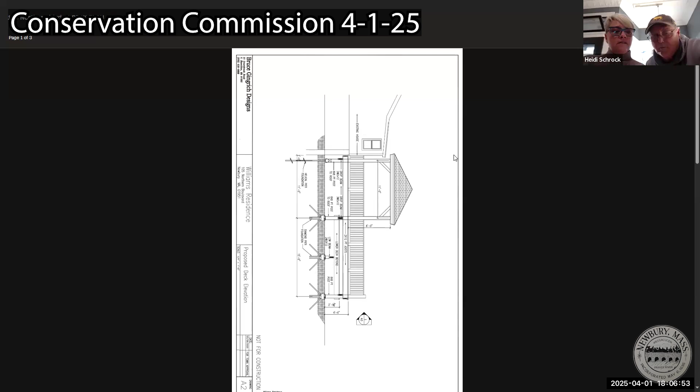Okay, can you rotate that plan? You should be able to. One second.

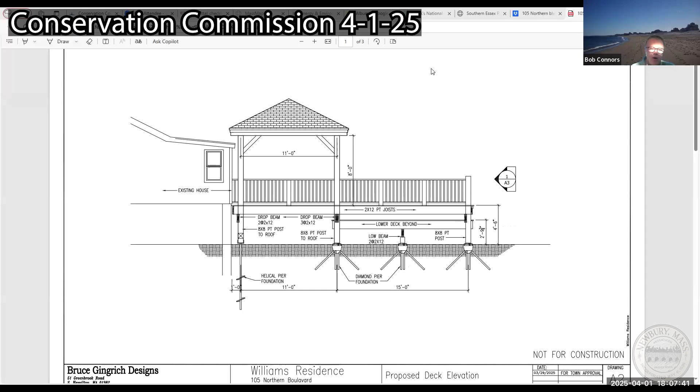So Woody, all we've done is approved the meeting minutes for the March 18th meeting, and we're on the first order of business, the RDA for 105 Northern Boulevard. We're just looking at the plans the applicant has submitted showing the diamond piers and the elevations. As I recall, that's the additional information the commission was looking for, Mason?

Yep, that's correct. Mason, do you have any questions on this, or are you all set? I don't have any questions at this time. Okay, why don't I open this up to the members for questions?

TJ, do you have any questions on this one? Why did you skip me for now? This is the first time I'm looking at this, Bob. Okay, I must have missed this one, but I'm just taking a quick peek.

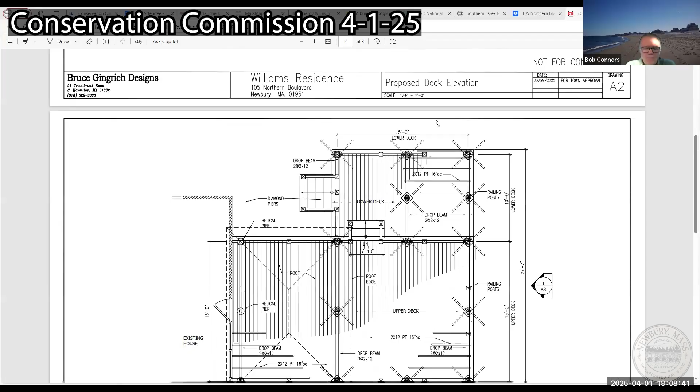I wasn't at the original meeting on this, but Mick, any questions on this one? No, I think we were asking for details on the pier supports, and this seems to meet that request. Okay, so I think we're good. Anything else, Mick? Not at this time, no.

Okay, Diane, any questions or comments on this one? I recall on this one, you guys are replacing a deck that is already there, and then you had another area that's sort of like a patio that you were making into a deck. And I recall we had talked about existing versus what's new. I still am not seeing what was there in comparison to like an overlay. What is this new plan going over what's already there?

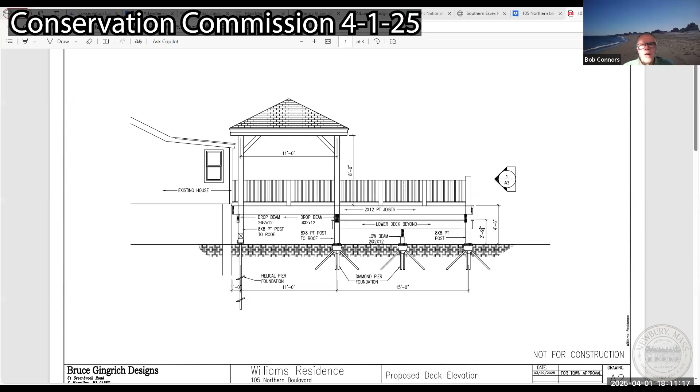Okay, hearing none. Do any members have a request for additional information? Okay, hearing no request, I will entertain a motion to issue a negative determination for 105 Northern Boulevard.

So moved. Second? Mick, is that you? Yes, it is.

Okay, roll call, all in favor. TJ, aye. Woody, Yes. I apologize, I skipped right over you.

You're hard to be invisible, you're just such an important feature of this commission. I didn't have any questions. I would have spoke up.

Okay, well, sorry about that, Woody. No, it's okay. Okay, Mick? I joined late, no additional questions, thank you. Okay, Diane? Yes. And voting Bob Connors on the motion votes yes.

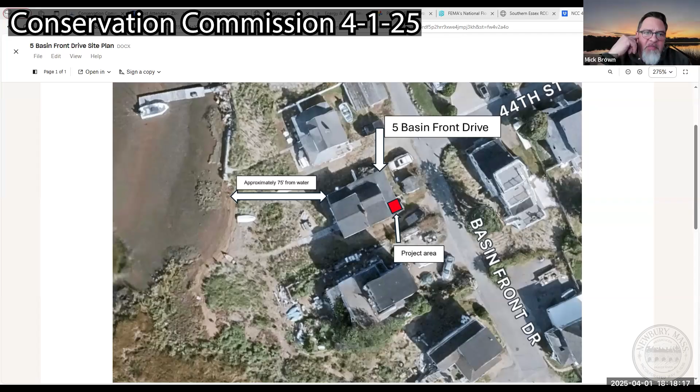Okay, Mick, what are your thoughts on this one? Yeah, I don't know, on the first drawings that Mason showed, it appeared that the only change was really the roof line. Am I correct on that, Mason? I think they're just enclosing the sides, making it - there was a change to the roof line as well. Was there? Okay, yeah, I can share that.

Okay, so they're making it, left is existing and the right is proposed. So they want to put more of a gable end on that than a flat roof.

I think if there's no change to anything below ground and they're not expanding, it should be okay to go forward. Are you comfortable just saying that in the event footings need to be replaced, concrete sonotubes are not allowed?

Yeah, they'd have to meet the basic standard, but just changing the roof line too, it doesn't appear to... you have runoff in one direction, now you have runoff in two directions. So just as long as they compensate for that. I look at the design and you've got a roof pitch into your stairway, so they're obviously hopefully going to compensate for that, but that's more of a construction issue as opposed to a ConCom issue.

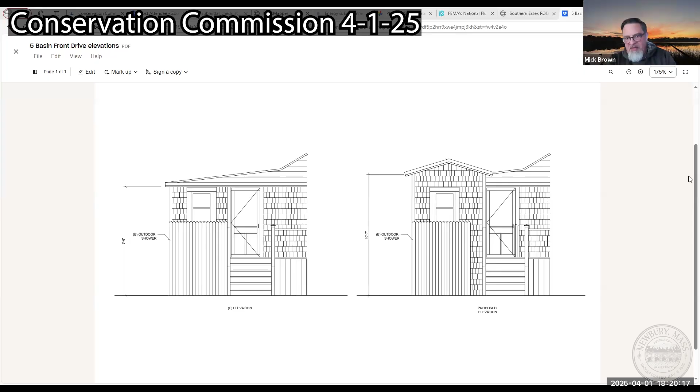Okay, so why don't we continue this to April 15th. If the applicant should pop back on, Mason, if he got disconnected for some reason, we can circle back to this before the meeting's over.

Okay, sounds good. All right, next application is a request for determination of applicability. 13 Plum Bush Downs, applicant is submitting an RDA for installing a crushed shell driveway and other minor associated site work. Project is within 100 feet of the salt marsh, proposes native plantings as well.

Mason, why don't you give us a quick overview, and is the applicant here? Yes, the applicant is here. So it's the addition of a crushed shell drive.

Right now it is not really vegetated. It's just kind of dirt and mud. It's been kind of just torn up and degraded. In addition to the proposal of the additional crushed shells, he's proposing to remove an old concrete holding tank, and I believe he is planning on doing some native plantings as well around the property. So I will share the site plan and hand it over to the applicant.

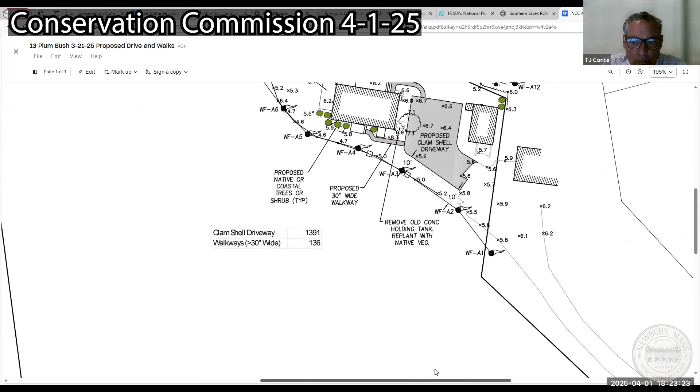Proposed versus existing numbers of what you're getting, what you're giving back as to what you're expanding. I think the question is, we're giving you something, what are you giving us back? What improvements are you making? You gotta pay the piper, Seamus.

Gotcha. Yeah, I think looks like you have part of that proposed in there, but just to quantify what it is. Sure, I think part of that is removing that tank, obviously, and then trying to do some more of these like native plantings around the house. I saw on the mass.gov website, they have a list of recommended coastal landscaping plants as well.

So probably something of that nature. And then, like I said, I guess that's what it would be as far as giving back right now. Like I said, there's not much there. It's a lot of mud and dirt, and at the time, with the time being...

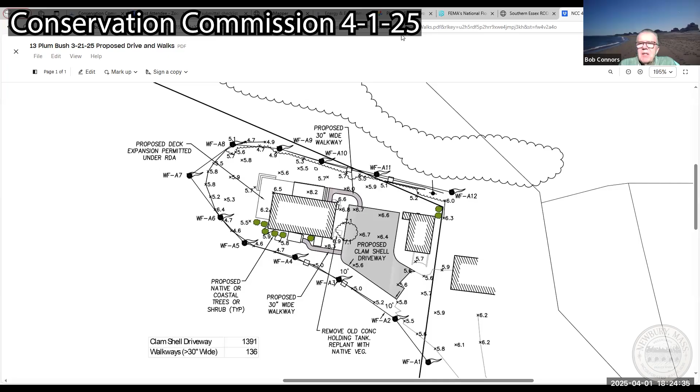So propose like a pervious material, obviously, for water drainage and stuff. But I mean, typically, you have an existing driveway and you have a proposed driveway. I think that's what TJ is getting at. Yeah, so what's the delta between the two?

We lost the picture there, but I was going to pull up some photos if that helps. Okay, yep, perfect. I think that proposed plan, I should pull it up here too. I'll just bring this back up for now. I have to share the photos over to my computer and then I can share those with everyone.

So the line does show kind of where it's gray. You could see like that 5.6 at the bottom right, it says 5.6, 5.6, 5.8. So that's kind of where the driveway stops now, and it's all 3/4 crushed stone there, but basically up to the front walkway, or where it shows the proposed front walkway - if you cut a line straight across to the boathouse, everything under that is dirt and mud. So it's not really like an existing driveway per se, in the sense that it doesn't have any of that 3/4 crushed stone brought in.

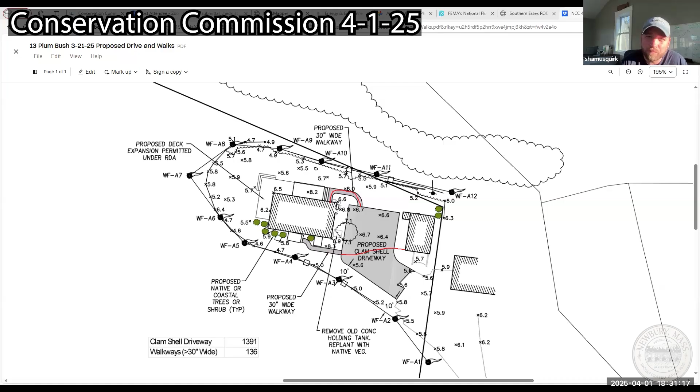Woody, go ahead. My only questions were already answered - what the walkways were made out of. And if I recall from when we saw you before on the deck extension, it's lawn all the way around the house, correct? Manicured, mowed lawn? Yep, so I'm good. Thank you, I have no other questions.

Are there any raised hands from the public at this time? If anyone has a question on this project, just give us your name and address. Okay, hearing none. All right, so team, to do a recap.

I think if we consider a negative determination, I don't want to use the word conditioning it, but any disturbed areas must be revegetated in like kind, and the applicant will submit to the agent the species of 12 shrubs and determine the location in the field with the agent. That way, where there's any disturbance, whether it's lawn or whatever, we'll get it reseeded, and adding some bushes to this project will be a benefit to the resource in my mind. So what's everyone's thought on that?

Mick, does that sound okay? I think that's good, that's a good plan, Bob. Yeah, not conditioning, but just making sure disturbed areas get revegetated. Absolutely, that would be the intent. TJ, good with that? Diane, how about you? Fine. Woody, does that work for you? Sounds good.

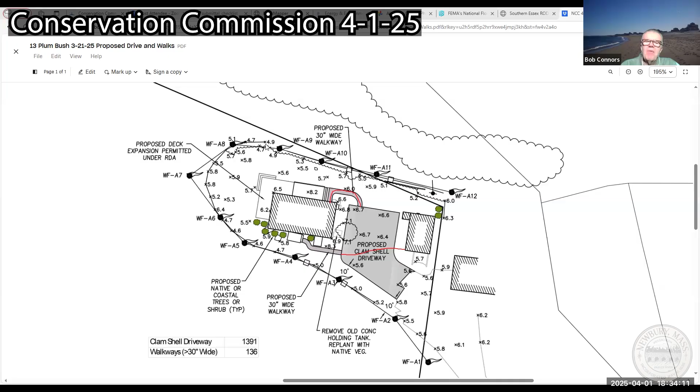And that he'll have a pre-meeting with the agent prior to planting, prior to start of work. So just to clarify, with that determination, I can go ahead and install the driveway and walkways, but prior to plantings, call Mason for a pre-meeting. Yep, usually what you do is call for a pre-meeting, go over everything, lay out what you're doing, and at that time verify where you're going to put the shrubs and the species. And then at the end just make sure anything disturbed is replanted. Mason, do you have that information? Yep.

All right, so you've heard my motion, I will entertain a motion as stated. Do we have a motion? So moved, second - TJ and Diane. Okay, roll call, all in favor: TJ, aye. Woody, yes. Mick, aye. Diane, yes. And Bob Connors.

All right, next matter is a request for determination of applicability at 1 Jackson Way. The applicant is submitting an RDA to install a standby generator on the left side of the house. A concrete pad is proposed to be constructed as a platform. Mason, why don't you give us an overview on this, and if you can - I noticed there was a location submitted, but there wasn't an elevation on the platform, as I recall.

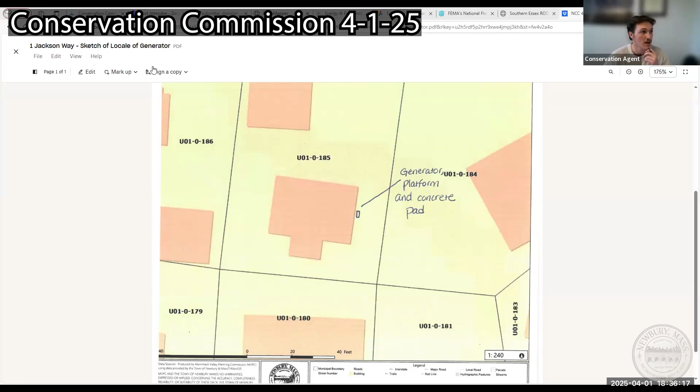Is the applicant present? I believe this is Sam Gobriel, I'm Kareem's dad. Kareem is probably on the train, I don't know if he tried to call in, but I'm helping my son with this project and working with Moral Electric.

I visited with the owner of Moral Electric when he located the generator from the corner of the house, and it is a prefab pad, as I understand it, and it would be a minimum of 2 feet off the ground, maybe 3, but we'll just see how it ends up being. That existing small shed right there is the old standby generator. It will be to the right of that, towards the corner of the building, away from the deck, and it will clear the required measurements from the window as well as the deck height.

Sam, where is the propane? I'm assuming this is going to be powered by propane? The propane tanks are in the back of the house, the opposite corner, exactly the opposite corner. So it's the back right of the house where the existing 2 propane tanks are right now.

Now, to run the piping for the propane to the proposed generator location, are you going to attach that to the house, or are you proposing trenching it, burying it? Proposing to bury it, so they'll dig a trench to the back corner of the house and then make a right-hand turn, dig a trench, and connect to the line right where the tanks are.

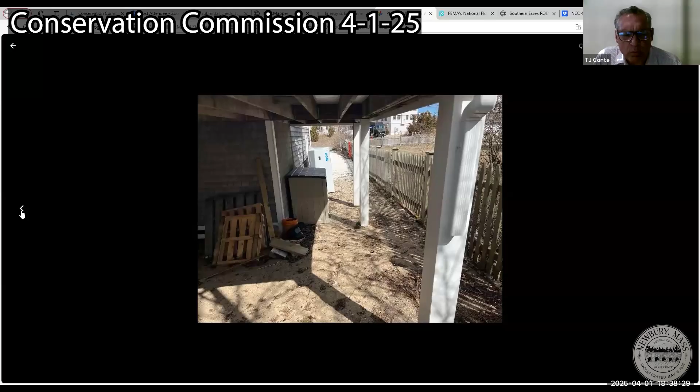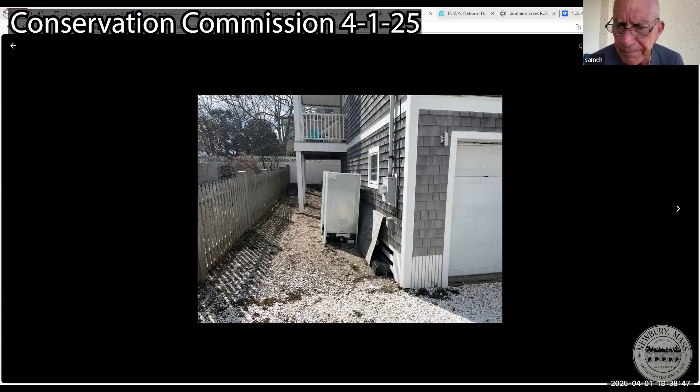Okay, why don't I hold you there and open this up to questions from the members? TJ, any questions? What is the generator sitting on, going to be sitting on? Going to be sitting on a concrete pad, and then on top of the concrete pad will be a wooden platform, I believe it's pressure treated wood, to raise it off the ground. Anything else, TJ? No, the tanks are already there, I assume, correct? The existing tank for the house, yes. Okay, I'm good.

Woody, questions for Sam on this one? No further questions, they've all been answered. Mick, questions for Sam? I am all set on this one, Bob. Diane, how about yourself? Nope.

Thank you. Okay, so Sam, traditionally we want to see the generator elevated by 2 feet, and typically it's just 4x4 pressure treated timbers put in the ground a couple of feet. Concrete is kind of a no-no out there on the island to support the base. Mason, could you share with Sam or the applicant a typical example, I think Dave Mullins' house on Northern Boulevard had the elevated tank, and it just gives you an idea what the commission usually accepts. So having a concrete pad on the ground and then building off of it 2 feet.

The 2 feet elevation is great, concrete pad is not. So why don't we do this: Mason, you can share with him a sketch and go over what we typically do. It can all be done with pressure treated wood, that's what everyone else has been doing. Mason could even give you an address that has the elevated pad that we typically approve.

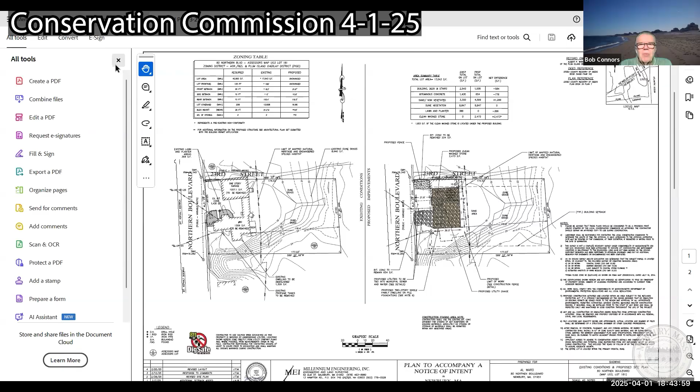Okay, so Al, welcome. If you could just give us your name and address, and if you want to make some opening comments, please feel free to. Sure, yeah, it's Al Ward from 80 Northern Boulevard, and my comments are pretty much already addressed by your opening statements here. Just wanted to talk about how we...

After considering issues brought up by the neighbors and the DEP, we decided to change the location of the proposed house and move it further north away from the dune and eliminate the garage entirely. So we're now staying within the existing footprint of the current house, which resolved all the issues raised by the DEP. But yeah, so that's just to kind of recap what's already been discussed here.

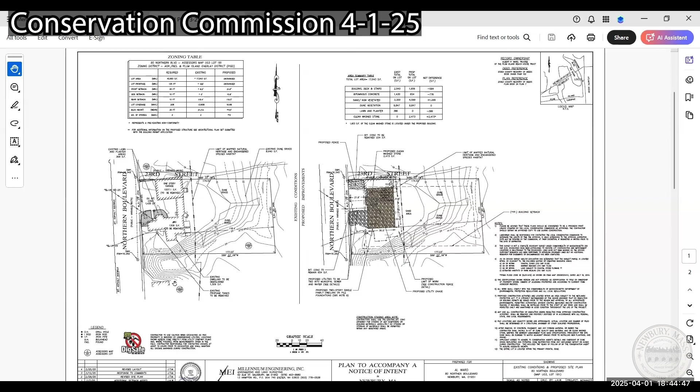So TJ, I'll just hand it over to you to go over the details in more depth. Yeah, no problem. Could you just expand that plan a little bit? Yeah, I was just kind of doing it so you could see existing versus proposed, but we can pop back into the existing here. Yeah, there you go.

So again, like someone stated, previously the garage was proposed to remain. We're proposing to remove that at this point. The house is shifted up pretty much right on the setback line. We're like a foot off just to allow for a little bit of play during construction, maximizing the buffer between the southern abutter and the most southern part of the house.

As doing such, we slid the house back to meet the front setback line. We've obviously removed the remainder of the house. This crosshatch here is the limit of clean wash stone we plan to install as part of the parking area and driveway for the lot. This area here is currently paved, and we're proposing to leave that in place to serve as that portion of the driveway. This was currently paved as well.

That will be removed. Let me hop over to the existing plan for a second. Remember previously we had a big green area here of dune vegetation that was going to have to be taken out as part of the old previous location of the proposed dwelling. The two areas we're showing now to be removed - this area here is mowed and maintained lawn by the applicant, and this area is kind of like a planter bed, non-native dune. It's not a dune grass area, so those two areas are proposed to come out.

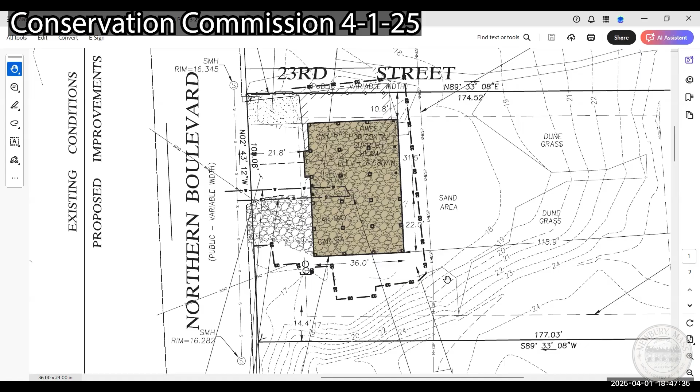We've updated the erosion control line to just hug around the existing foundation. Any disturbed areas, like the foundation, driveway, or garage areas that are supposed to be removed, will all be replaced with sand. As Mason stated, we received confirmation from DEP that all their previous comments have been addressed, and I believe we're good to go from their perspective. So I'd be happy to answer any questions the commission may have.

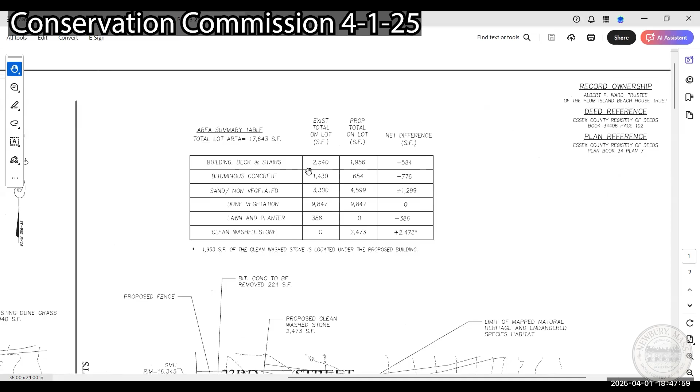Let me start. What is the square footage of the pavement you want to retain? Right up here. So we're proposing to keep 654 square feet of pavement.

Okay, and what's the proposed wash stone area? What I'm getting at, TJ, is that our bylaw limits you up to 2 parking spaces. You certainly have a right to maintain the pavement area, but you don't get to expand in another area unless you're eliminating the pavement. I think we allowed 2 9x18 parking spaces, 324 square feet.

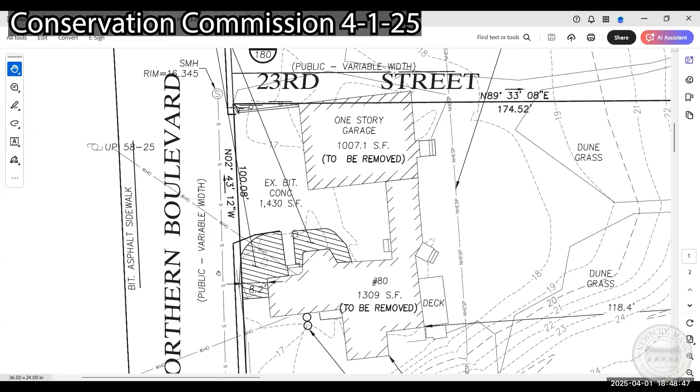Yeah, understood. I think I was going to say that the property currently gets 7 cars, 8 if they're small, because we're getting rid of the garage. No, Al, I get that, but you're doing a redevelopment, a tear down and a redevelopment, and you're limited. We can't let you expand your parking area beyond what's already grandfathered.

The wash stone you're showing, if you could go back to that plan, TJ. That looks almost like walking pavers, not 1.5 inch minus crushed stone. Where are you proposing to park the cars under the house? I believe the under the house spot would be the furthest north, one spot there, and then the two south ones—one has a stairway to get in, and the other has a shaft for utilities.

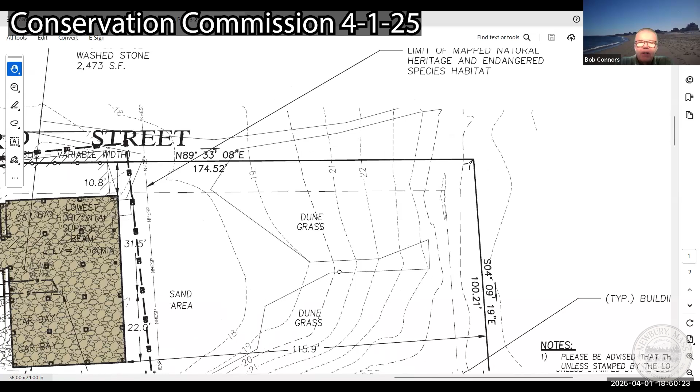Like I say, I think you've done a great job reducing the scope and meeting a lot of the neighbors' concerns. I'm struggling with the square footage you're proposing—expansion of a driveway beyond what's already grandfathered. And then you're proposing to add, what are you using for stone, TJ? What's the proposed stone size? Is this stone gravel? It's clean wash stone. I know the hatch is deceiving, we just do that for depiction purposes, but it will be 1.5 inches at the surface.

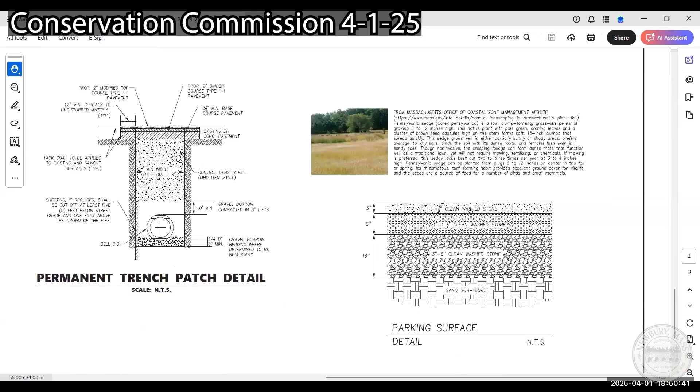What we've been doing—a lot of times contractors tell us that if you do a full depth of small stone, it tends to cause a lot of rutting issues. So we've come up with something similar to this, giving more structural depth and then a small stone at the surface.

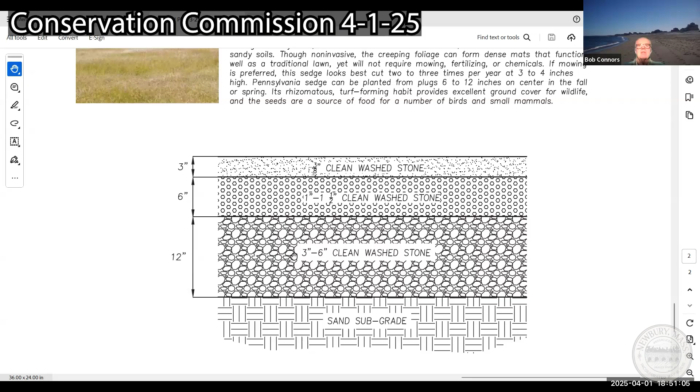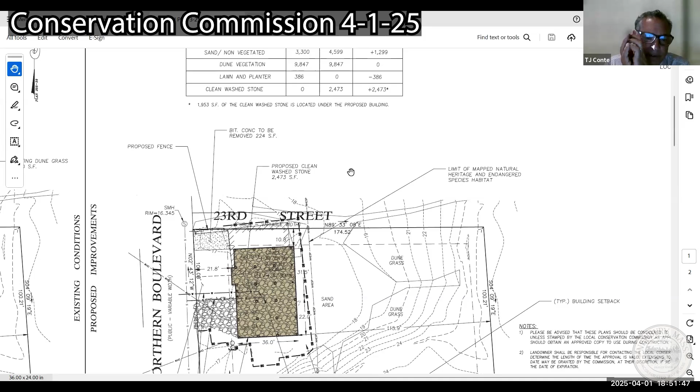If they take up the hot top and put in all crushed stone, does that mitigate some of the extra parking? Well, if you realize we've had a matter right down the street that was open, they were looking for more than 2 parking spots. It became an issue. Town council ruled that they were adding up to 2 parking spots.

Al Ward does have existing parking here that he can maintain, but he can't exceed what he already had. He's grandfathered to a certain extent to the hot top that he has, and in the past we've considered letting them remove the hot top and put in pavers, but they have every right to maintain the hot top—it's a non-conforming existing yard feature. But to expand beyond that is where I'm hung up. TJ, you had a response to that?

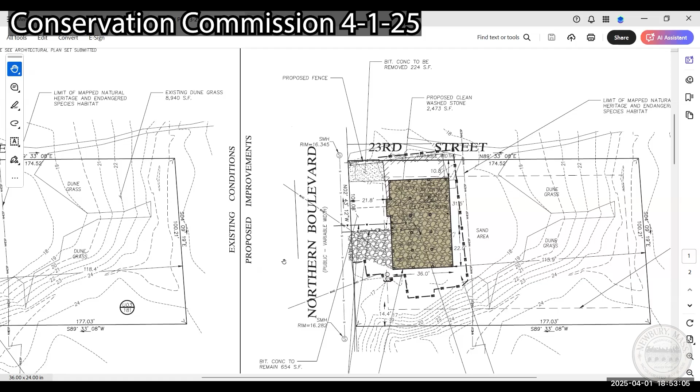I just wanted to clarify one thing. You mentioned the addition of parking spaces—if we did not increase the amount of spaces from what's currently there, would that be acceptable to the commission? Like if we limited this to 3 under the building and 3 up front for a total of 6, where currently they can get 7, including the garage? Well, but you're kind of moving it from point A to point B, TJ. Yeah, it's just—this has gone through town council, it's gone through DEP. There was an appeal on this very same issue in another location.

And so it's kind of on the front burner for the commission. Our bylaws do give you up to 2 parking spaces if you don't have them.

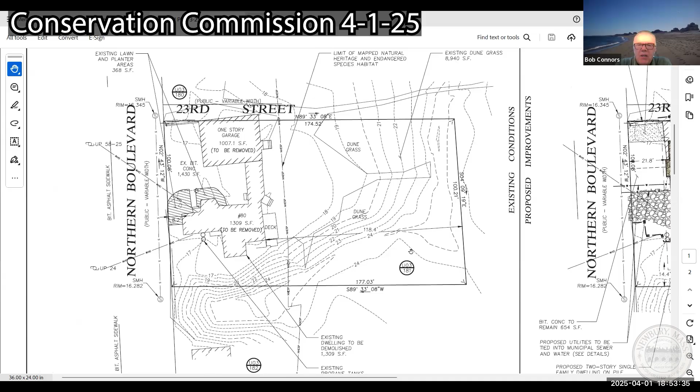So you've got what, 600 - go back to your table, if you would. Yeah, so we... I mean, what may be an improvement is if you eliminate all bituminous concrete and go to crushed stone. That might be an offset that could give us some wiggle room to give you what you want, give you the access that you want. So let me hold there.

TJ Conte, any further questions? No, I'll circle back with everybody. My question, if they eliminated the concrete, the hot top? Yeah, no, it's a good question. Woody, what are your thoughts on this? The parking seems to be the topic right now.

Yes, I have a couple questions. Parking under the building, are those considered parking spaces on the 2 that you're talking about? No, because they're within the building. So the 2 parking spaces only apply to the pavement that they're leaving behind out front, correct? Yeah, but just to be clear, if they had no parking, they could have 2. If they had 1 parking spot, they could go to 2. If they had more than that, they're grandfathered.

Okay, so where the square footage comes in, they really can't have more than the square footage of bituminous that they're proposing as parking outside the footprint of the house. Outside of the footprint of the house, okay.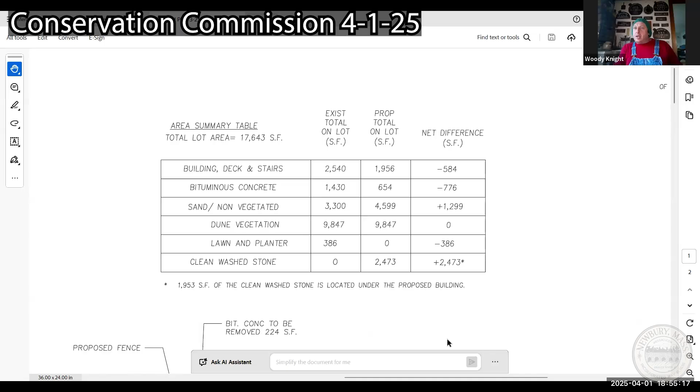Now, where the hashtag rock is, if you just move the screen - yeah, sorry, I was just trying to double check one thing as we talked about that. Go ahead, no worries, sorry. But on the screen there, it says the 21.8, that's the pavement. And the hashtag below it - this is right here - what is that right now? Pavement or sand?

This is like kind of the maintained lawn and planters in front of the house here. So this is the limit of, there's some pavement, right? If you move over to the right, yeah, there's an existing walkway, and there's all the area to the right where there's a squared off area, a little more to the right, TJ. This is all pavement now. So this is a paved driveway inside where TJ's cursor is circling, all the way up to the property line where it is now.

So that's all asphalt. I could share a photo if that would be helpful. Yeah, no, I think we're clear on that, and we're getting back to...

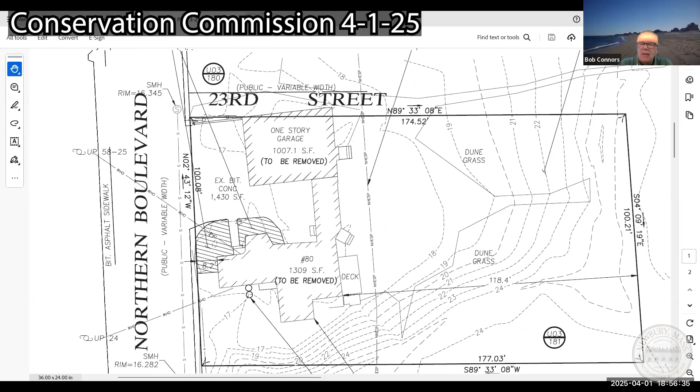What improvement are you making? You're in a very active primary frontal dune. By removing the house and raising it up, all good marks, by keeping it within the footprint, you know, same thing. But, you know, dune performance is always our concern. And although you have pavement, you can keep it all where it is, but the minute you start moving it around or eliminating it, it doesn't carry forward in my mind.

So the 21.8, or the 600 feet, is what you're leaving remaining outside the footprint of the proposed house, correct TJ? Correct, yep, the 654 is what we are currently proposing to keep, with a net reduction of 776. So, because you're eliminating that, because you're building the house on top of it. Correct.

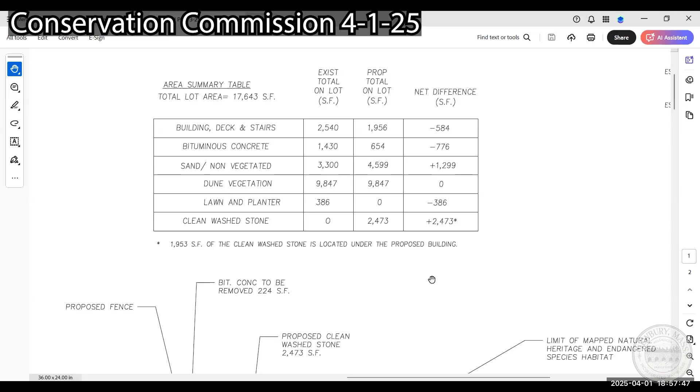Now, what is the area where you show the wash stone? Clean wash, okay. See, you're adding 2,400 square feet of clean wash stone. So outside of the building footprint, we're adding 520 square feet of crushed stone, which is additional driveway, ultimately. Correct - which is still less than the total of the current driveway now.

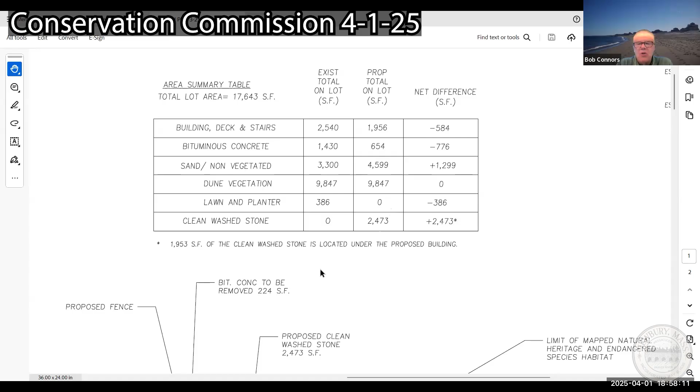Even with this additional driveway shown, we're reducing the overall driveway by 220 square feet. You're abandoning the pavement where the footprint of the house is. That's a decision you make, not us. Let me hold that thought and get on to the next member. Mick, questions on this project?

I'm going to move away from the driveway issue for a second. One of the things we discussed on the site visit, and was a topic in the previous meeting, is about the demolition of the existing building and how the dune to the south side of the construction is going to be protected. What's your limit of encroachment on that dune for demolition? What's the plan for live loading, dumpsters, demo and construction with relation to protecting that frontal dune?

Sure. I've spoken at length with the demo company, and they provided a letter explaining that they're going to be working from the north side of the house, starting on the south side and caving everything in to itself, so they're not accessing south of the house. They're going to start in the middle area in that paved driveway, and basically bring everything in on itself and haul it away piece by piece - pulling the garage out west towards Northern Boulevard, then moving in, pulling forward heading in the southerly direction, so they don't access any of the sand area of the property at any time during demolition.

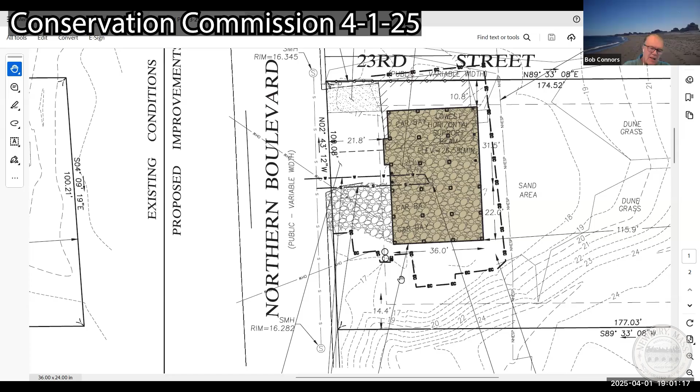Okay, thank you, Mick. Dianne, I'll circle back, Mick, because we're going to have public comment. What are your thoughts on this one? I think it greatly improves the situation that was going on with the dune there, but in doing so, unfortunately, you've stripped yourself of some parking - so back to the parking issue.

I really don't have questions, I understand what's going on here, but it's just how many parking spaces? So you have 3 under the house, and then how many up to the house from Northern Boulevard? It's 3 or 4, depending on how large the vehicles are. The way we wrote it out this way is because it's similar to what we have now - it's now all on pavement, getting 7, but the proposed one has a reasonable way to park the same amount, so really 3 to 4 in front and 3 under is really what we're looking at.

So Dianne, the parking under the house - the issue with parking is if it's under the house, it's not displacing vegetation. If it's outside the footprint of the house, the intent is to minimize the disturbance of vegetation in a primary frontal dune. And what's under here now, under where the crushed rock leads from the street to the house? That's primarily just a typical sandy, gravelly - it's not hot top, it's not crushed stone, not vegetated - it's Plum Island barren land.

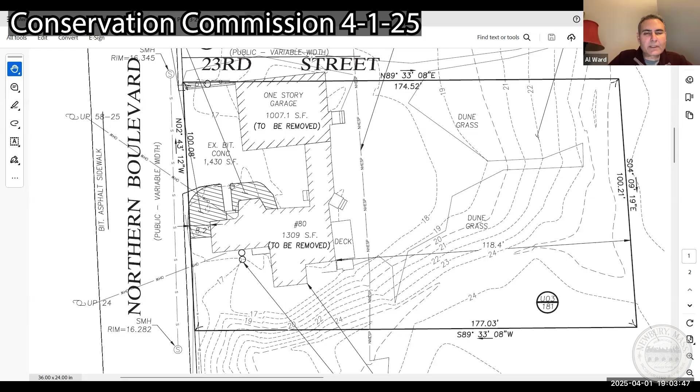Can't solve it. What's the fence made out of that you're gonna be putting in on the walkway side, the 23rd Street side? We were thinking of a fence comparable to the one in front of the house now, which is a split rail fence. Okay, that's it.

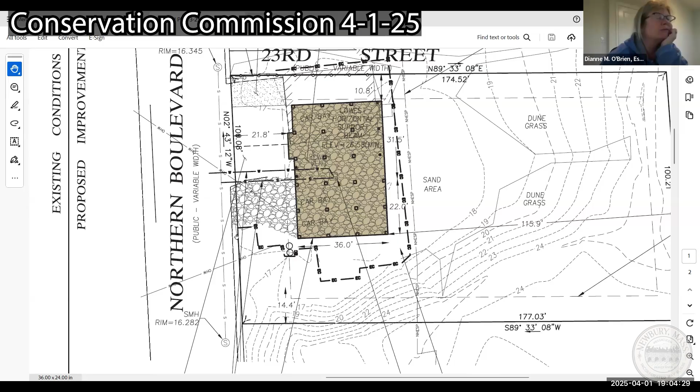All right, let me circle back to Mick. Any follow-up questions for Al or TJ? No, just how to handle this parking issue. We do have precedents that we have to adhere to.

So under the house does not count as additional stone that they're putting down. Am I understanding that correctly? It doesn't count in my mind as additional parking spaces. Right, okay, so the only additional is in the front of the house.

It's the opposite. When a parking spot is created, it eliminates vegetation. If you add a parking spot, it's less vegetation than you can add. But you have a right to maintain what's existing. But you don't have a right to just put it any place you want either. If you're going to abandon it because you want to put a house there, that's a conscious decision you make as the applicant.

But I have a question regarding that. Can I ask it now? Yeah, you can.

Does the existing parking in front of the house hold a precedent of what's existing? I was led to believe that would hold. Is it in front of the house currently that's paved, not including the garage, but in front of the garage and in front of the breezeway and the rest of it, that area TJ is referring to, it's currently paved for 3 to 4 parking spaces.

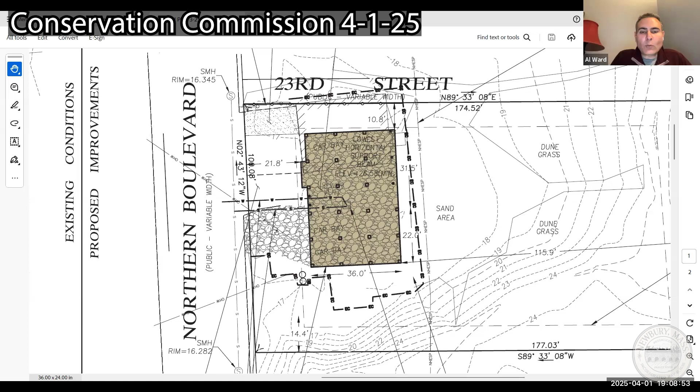So what you're saying is, not that I'm proposing this just yet, but if it's an option for us and you think it'd be better, we would consider it. So the part to the north of the driveway that we were going to pull the asphalt off, if we leave that as asphalt, and then to the south where the pavers are, we take away some of those pavers, that would be more desirable to stay within the rules of the town. Is that accurate? Am I getting it wrong?

What is non-conforming, you have a right to maintain. But it doesn't mean you can say, I'm going to take 200 square feet here and put it behind the house. You can maintain an existing non-conforming yard feature, but you cannot expand beyond that because you're already over what's allowed by the bylaw. So your non-conforming parking now exceeds the bylaw, but again, it's non-conforming and existing. The minute you eliminate it or try to relocate it, it's not existing anymore - it's proposed.

So Bob, can I jump in on that? Yeah, TJ, go ahead.

Well, I guess the thought is, if we maintain all this pavement and eliminate this, that's fine. But taking this out and putting this as not seems a little counterintuitive. I get what you're saying, like the precedent, the bylaw, typically thinking removing the pavement.

If you're replacing - were talking crushed stone the whole way, TJ. Yeah, many commissions would probably make you take out all the pavement and put crushed stone in.

We recognize non-conforming existing yard features, which I believe is the fairest way to do it, because I live on the island and my paved driveway was existing, but I didn't move it 1 foot, 1 inch. But was able to maintain it, and trust me, it's a big plus. TJ, my next door neighbor, would love to have my driveway, but I'm not sharing it.

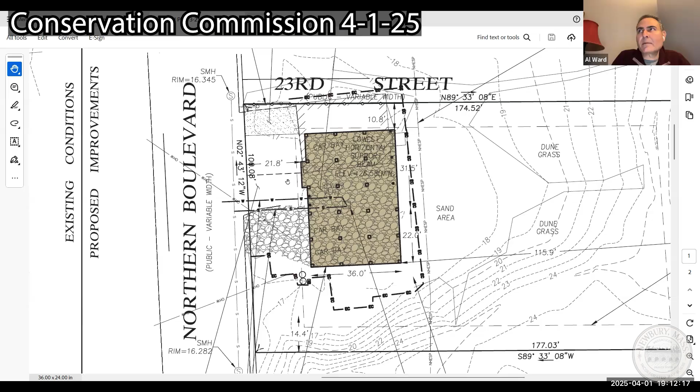Well, yeah, and that's why we're trying to do it this way, is to get rid of as much as we can, but from the environmental standpoint - completely from the shoveling standpoint and ripping up stone, we're lifting up stone as opposed to pavement. It was more of the convenience of that for the wintertime. So that's kind of what we're struggling with here.

No, listen, I get it. We've just gone down this whole road with the paving, with the parking issue. And so we've got guidance from town counsel, guidance from DEP. I'm not sure it was appealed by an abutting neighbor, and I'm not sure if that's been resolved, but it had to go to MIPA because it was an appeal.

And it became clear to me and to the commission that parking is what it is. You're in a good position because you have pavement and you do have a right to maintain it, but why don't we do this - we've got a long agenda tonight. Let me go through this and open this up to public comments too, and let's see what the public would like to do. Any other members have a question before I open this up to the public?

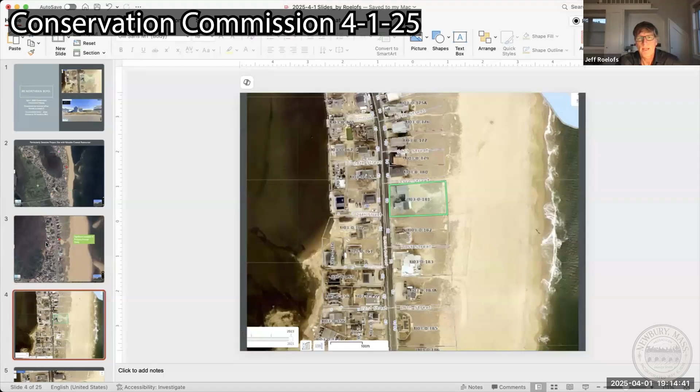And then over here, as I understand it, they're not proposing to impact this, but it wasn't clear from the plans. The fence that's there now goes to this location. So we question the extent to which this vegetation's proposed to be disturbed.

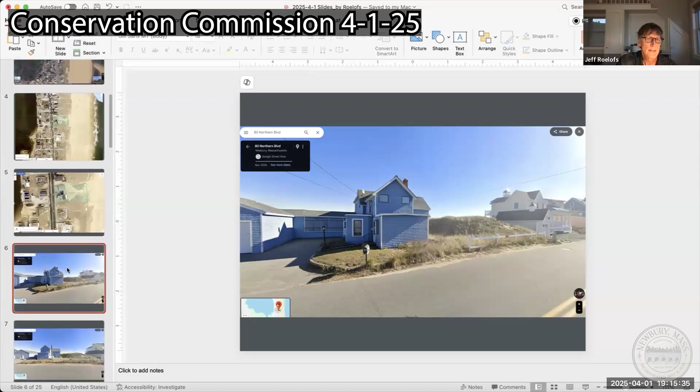That's just another image of it.

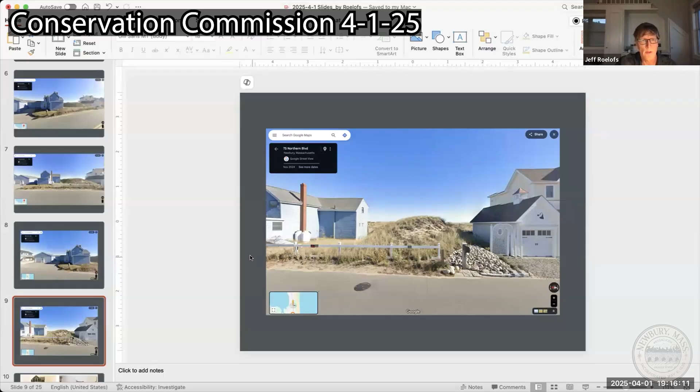On this, I want to point out, my clients are here. One of the measures they implemented that we think should be done here too is that for the areas outside the house where you're proposing to maintain dune vegetation, it's important to also put measures in place to prevent people from walking through there and continuing to use it as a pedestrian path. You can see that done there, and we'll get back to that. You can see it more clearly here. So these are the kinds of measures I'll be referring to in terms of how to protect vegetated areas.

The flood functions served by these primary frontal dunes are important.

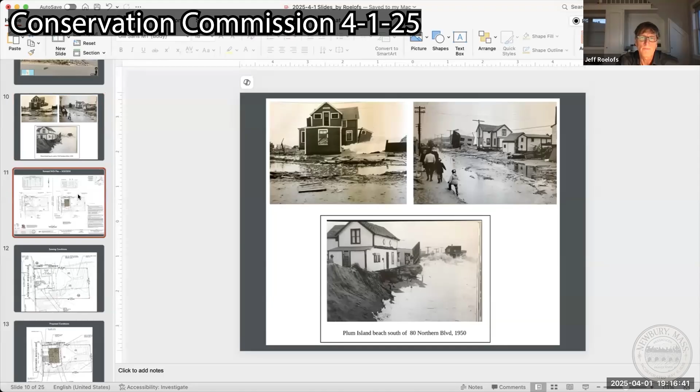So DEP, I saw that they did sign off on things today. We were a little surprised, because one of the comments they made on the 17th was a request to specify the temporary and permanent impacts to the primary dune and how the project will result in a net improvement to the function of the dune. I don't believe the applicant has actually submitted any response to that.

I appreciate that the revisions are significant and an improvement over what was presented before. The question we're raising, though, is whether they've actually had a qualified professional get involved here to deal with how this project will impact the dune, to be involved in the design and the measures aimed at protecting the dune to the extent you can, mitigating it, and also protecting it long term. There's not a professional wetlands consultant or other coastal professional on the team. That's always been a concern of ours.

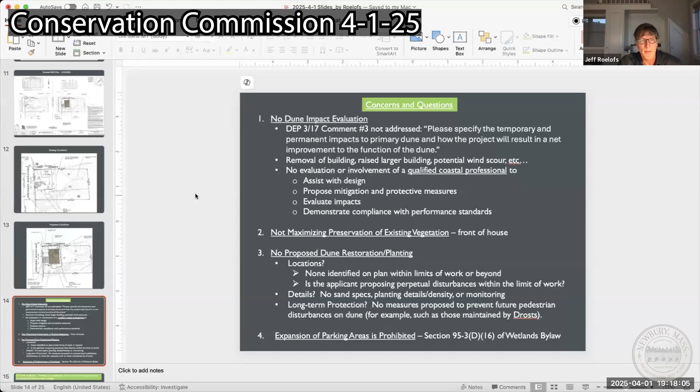Number two, maximizing the preservation of existing vegetation. That goes to your parking issues and whether it makes sense to actually take out the vegetated area, even though it's been maintained as a lawn area — it still may serve some dune functions.

I heard tonight that the areas they're proposing to disturb within the limit of work, they're going to be restoring those. The plans don't make clear what they're proposing to do within the limit of work in the areas beyond the footprint and the driveways and parking areas. It should be clear those areas are not only going to be backfilled with sand, but also planted. And then what are the specs on the planting?

Ideally there would be some monitoring. And in addition to monitoring, just long-term protection. So what measures are you going to propose?

They mentioned the fence in the front being maintained. What about on the north side of the property? If you're going to plant on the north side, is there going to be a three-rail fence there to protect against the occupants, potentially future owners and renters, from just using those areas as pedestrian pathways?

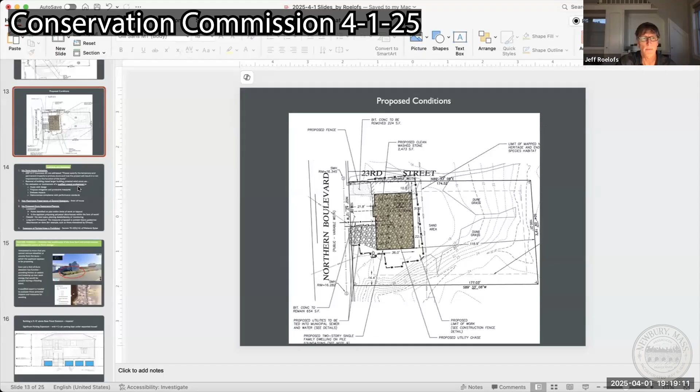Just now taking those forward. In addition to the parking issues raised by the local bylaw, the state regulations also prohibit any modification of the dune form that would increase the potential for storm or flood damage. That provision has been interpreted as prohibiting the removal of dune elevation, which it looks like you would have to remove some elevation here if you're going to convert this grassy area into a driveway area, right? So that's just another issue associated with the proposed driveway in that location.

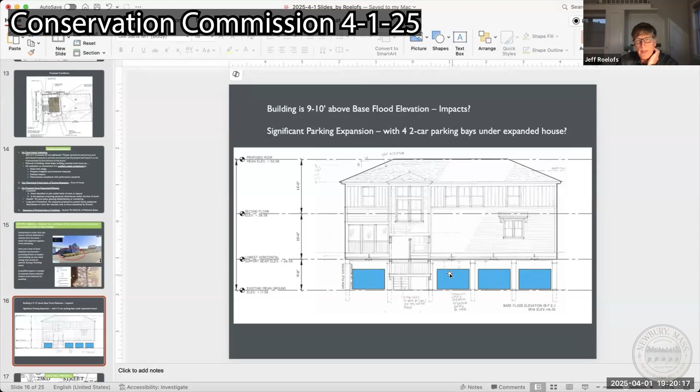So there's been some clarification provided tonight. I couldn't tell from the plans, and I think these constraints should be identified more clearly. From the elevations, it looks like there's potentially 4 different car bays. I know Al said this bay here isn't available for parking. The stairs are here, so there may be something else that prevents it, but it's a question of what areas under the building are actually available for parking, and the design comes into play there.

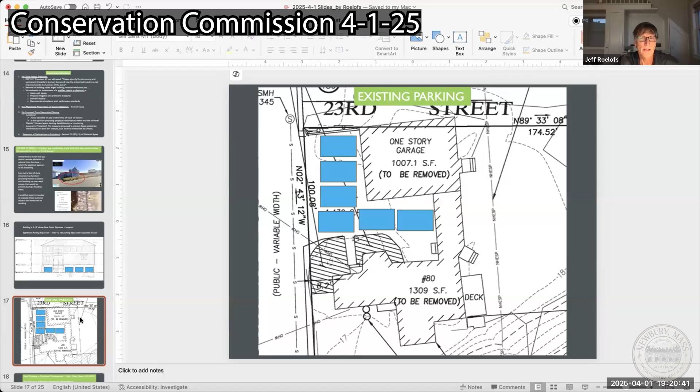So this is sort of my really makeshift attempt at evaluating the parking issue, but we're going to leave that to the commission. Existing conditions, we're seeing that you can probably get 6 or 7 cars in the existing paved areas. Not having any reason to think otherwise, it seemed to me you could just pull in multiple cars in each of these rows, and maybe I'm wrong about that.

Al said you couldn't pull into this bay. I think the plan should be clarified as to which areas under the building are actually going to be available for parking. And then obviously in the front, as currently designed, it's definitely an expansion of the parking over existing conditions. That's the point of this.

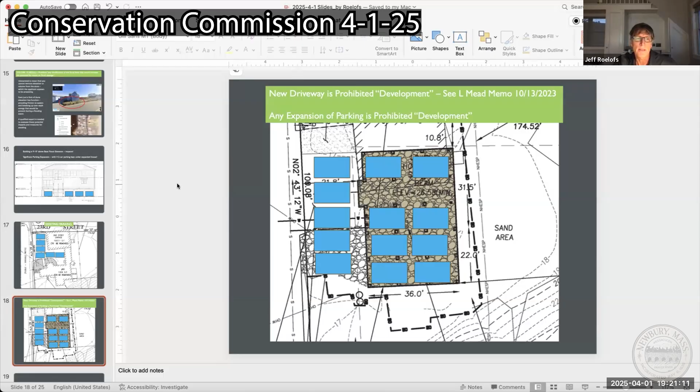Possibilities are, as you were discussing earlier, instead of taking out that grass area and filling it with stone, just maintain it as a vegetated area, improve it even, and then protect it with some sort of delineated fence, extend the three rail fence. So you've got solid vegetation there.

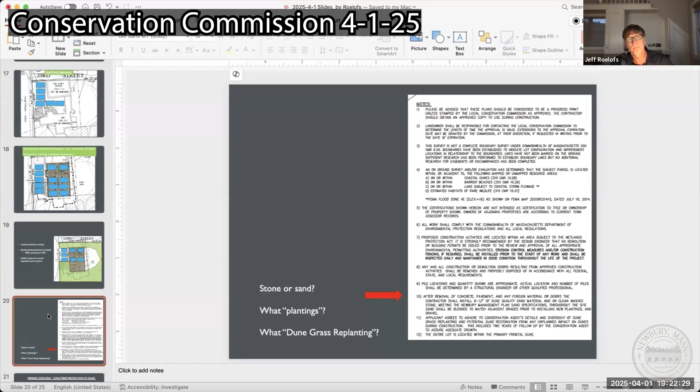Jeff, this goes to some of the notes. Let me do this, Jeff. Yep, you've raised a lot of points. I think TJ Melvin should have an opportunity to address these as we're bringing them up, rather than having you get to your last point and then we're not talking about the first. Yeah, I'm happy to pause at several points. Okay, and I think TJ will take exception that there's not a wetland professional on this project, but TJ, would you like to respond? I have a lot of respect for TJ as a civil engineer. I don't think TJ is a wetlands consultant, but I know his team. He can usually correct me if I'm wrong. TJ, would you like to respond to Jeff's initial questioning here?

Yeah, I mean, I'm not a certified wetland consultant. We've done permitting in Newburyport, Salisbury. I just really wanted to respond to the statement that there's no net improvement here. We did respond to DEP's comments in a letter which was submitted to the commission. Again, I'm not a coastal geologist, but we are removing a foundation at grade, removing a large portion of pavement, putting a building up in the air to avoid the pictures of what happened as shown in Attorney Roelofs' slides. We are trying to improve this site.

We're lifting the building up. We're removing hardened surfaces at grade, removing a foundation at grade, and replacing it with dune compatible materials. Granted, we're not proposing to replant every inch of the property. I personally don't know that that's warranted to gain a net improvement to the dune in this area. I don't disagree with the sketch that's up in front of us. We can certainly look at a parking configuration, but similar to what Jeff had, 6 or 7 spots currently on site, which I know we've gone back and forth on the parking.

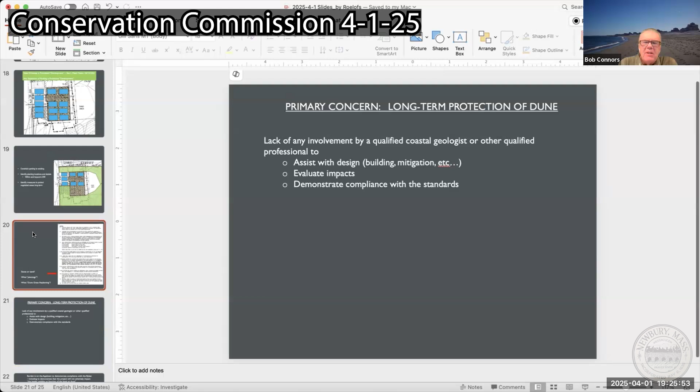Yeah, afterwards. So Jeff, why don't we do this? Mason, you have the communication from DEP responding. Mason reached out to the department today just to see if there are any additional comments regarding the latest plan submittal, so that we would be current on events tonight.

And Mason, what was it, we could read the caption of it. Yep, so Georgia Pendergast is the reviewer at DEP, and she sent in an email today at 2 p.m. saying, I've reviewed the most recent plan changes and I'm satisfied with the revisions. They took into account all of my comments and I have nothing further to add.

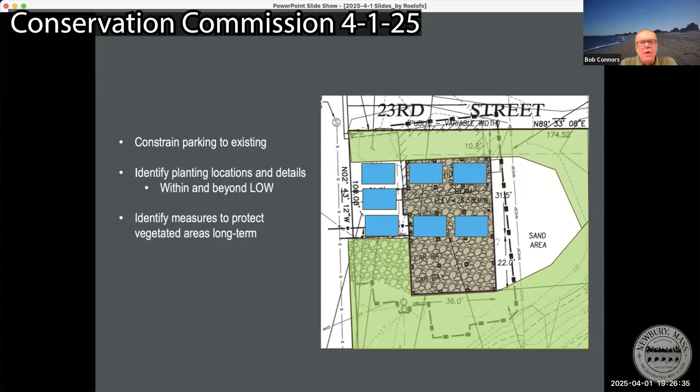Okay, so Jeff, from my personal viewpoint, I read that the department is satisfied with the submittal. Yeah, and I agree with you. I didn't see the written response that went in with the revised site plan, so I was just perplexed as to how they had addressed comment number 3. Obviously they did, I didn't see that response, and it was to DEP's satisfaction, so I don't dispute that.

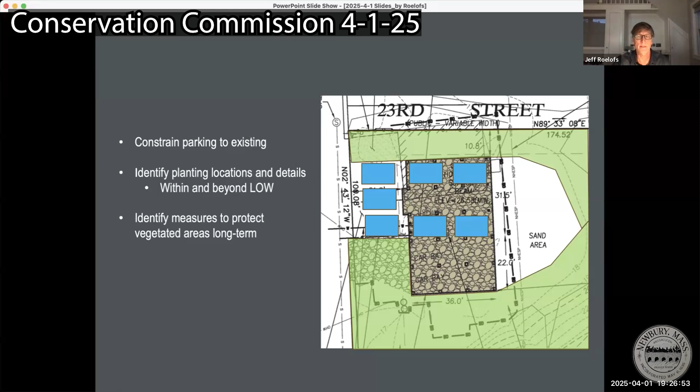And then I'll just wrap up my thoughts here. I mean, again, our biggest issue is the protection of that dune, right? So it's really a question of fine tuning the plan, making it clear where this point is long-term protection of the dune. Make it clear where there's going to be plantings at the end of construction. Where are you going to replant? Where's the vegetation going to be? And we want that plan to be a plan of record so that those vegetated areas are established and then maintained long-term. That's the goal. It's trying to comply with the bylaw and the various requirements, all of which you're doing also, and we appreciate the effort there. So with that, I'll just turn it back to the commission.

Thank you. Okay, TJ, on planting, because you're not keeping the garage, you're not proposing any replanting at this time, as I recall. Correct, yeah. Proposing to replace with sand. I think the question really comes down to, on the proposed parking, you're eliminating existing vegetation and proposing to put crushed stone in there. I'm still hung up on that for the obvious reason.

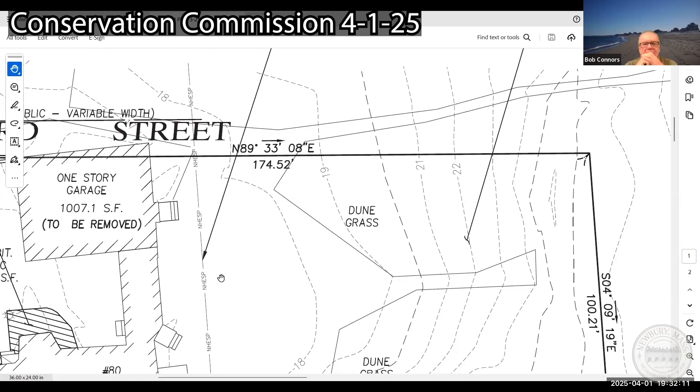So I do agree, TJ, that the proposed stone driveway that you show there at the south side of the property, you'd be eliminating vegetation to do that, and you'd be expanding beyond what you have for grandfathered parking. So the question is, I'm not comfortable proposing that, considering that as an option.

I guess the question is, you can certainly maintain the hot top that you have. The one area that you were proposing to eliminate and plant grass, you could do that, or you could continue to maintain that non-conforming use. But beyond that, I'm just not seeing a pathway forward to allow any further parking on the property. Understood.

Al, I think you and I can talk offline, but maybe consider flipping it similar to Attorney Roelofs' sketch, show two parking bays here and propose that to remain, and talk about getting rid of this. If you did a mirror reverse of the layout, that would probably be perfect.

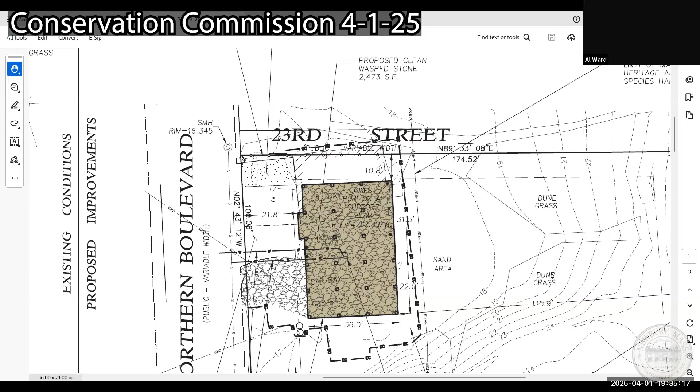current bump up of a foot or so of where that lawn is, keeping that lawn, and I'm trying to get it so I don't have to maintain as much in my older age. That's why I think the current proposal is best logically.

But I see where you're coming from with this, and I don't want to ask the commission to do anything that they're uncomfortable with too. So I'm open to being flexible, as you've seen, because we've made a lot of changes so far from our original plan. No, listen, I think you've done yeoman's work on addressing all the issues that have been raised.

And certainly you understand that it's a reflection of the sensitivity of the area. Absolutely. You're in one of the few areas on the island that has true dune migration. Most of us have dune erosion.

Yeah, I mean, it was talked about how our dune needs help. I know that when I bought the property, a previous owner did some stuff that really hurt the dune, but since I've owned it, it's grown over 8 feet. It's really doing well. If it wasn't doing that, I think I might have said before, I don't think I'd be considering staying there because the house is going to wash away from the ocean, but the growth has been phenomenal.

So what I'm going to do, if I can, is—we have a full agenda tonight, so...

Obviously there's a lot going on after this. I would suggest just looking at, if you can flip the layout of your plan, where your door, your entryway, now is kind of your second bay. If you just did a reverse layout, we would entertain a walkway to get you back to the hot top.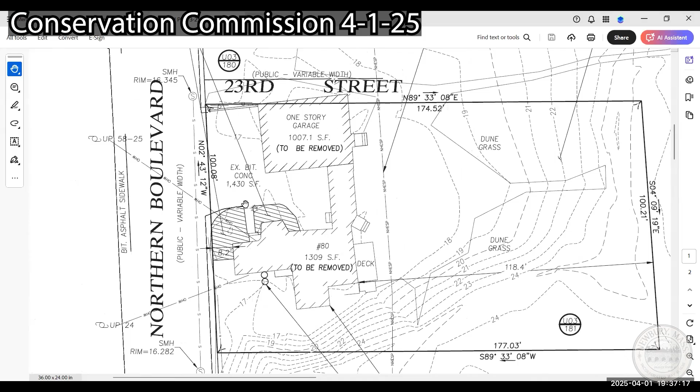Similar to the walkway that you currently have, maintain something similar to this to get you to the front door. Then you'd be ultimately able to utilize your existing paving, and I think we would entertain giving you a crushed stone walkway or something like that to get back to your pavement if you flip that layout.

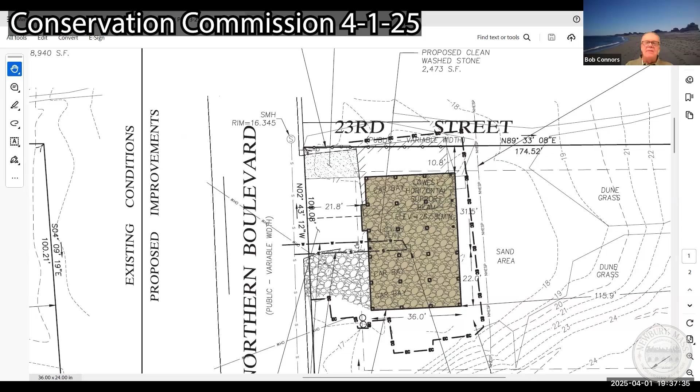All right, well, I don't want to take up the commission's time, but I'm going to need more explanation by TJ on what that is. Yeah, we can definitely discuss that, and there's other options from what you looked at too. But now that I know what you're concerned about, we can try to address it. It's just the limitations of what you can do with your parking, and certainly we're looking to add vegetation, not eliminate any.

That's the guidelines that we're dealing with, and that's what the regs and the WPA require. TJ, let me ask you this — any other questions from the members? Are there any other questions from the public?

Because I think you're close to where you need to be on this. I think if you request a continuance to our April 15th meeting and resolve whether you're going to change the layout or whatever, but I think you've got some good guidance from the commission and from the public tonight on what you're probably going to have to do to get this across the finish line.

Okay, yeah, I'll definitely follow that recommendation. I can request the continuance till the next meeting. I appreciate that. Okay, all right.

Recording in progress. I'll entertain a motion to continue this public hearing at the applicant's request to the April 15th meeting. So moved. Second.

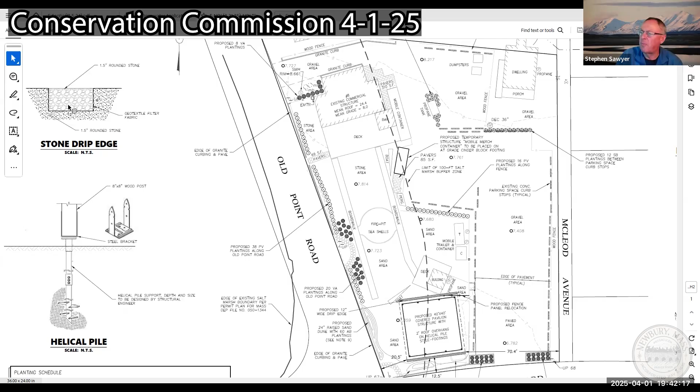So when the water splashes down, it won't create a trough in the sand, and it would just percolate through the rocks and into the sand. We are entertaining another option, a gutter and downspout, but we figure this would be the best approach right now.

It would be a rounded stone, so if someone stepped on it, we would use rounded versus crushed stone. So people walking across, if they're in bare feet, they would be comfortable.

So that's it. I guess what happened was, originally we were going to kick the can to have the peer review of the stormwater done during planning. But Kristen had called Mason and mentioned it might make sense to review it during the conservation process.

I think Vincent and I agree it makes sense, it's probably more efficient to just take care of it now. That way, as far as the planning board, it's taken off the table for any planning issues there. I think this might expedite the process a little and take care of the stormwater now.

So Vincent, you can chime in, but I think we're okay with whatever funds are needed for Joe's peer review on the stormwater. We'll put together a letter and submit that over the next couple of days. Hopefully it's pretty simple, it's clean water, we don't have to worry about standard 2 peak runoff.

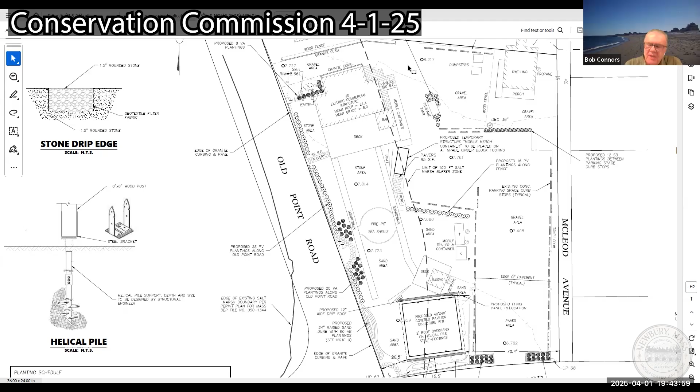Okay, so you're going to submit the deposit, and with Mason now, where does he do that? What's the process for starting peer review? I believe planning, Daniel and Kristen had reached out to ask for funds to be put into the escrow account, and then Joe will be able to review any updated stormwater calcs as they submit.

This is Vincent. I got an email from Daniel earlier today requesting those funds, and we will be depositing them tomorrow with the planning board into the escrow account, and they'll get Joe hired immediately once those are deposited.

That's good. All right, any questions from the members? This is going to be continued. I'm assuming, Steve, you're requesting continuance to April 15th. Yes, please.

Any questions from the members? TJ, any questions for Stephen? Not at this time. Woody, how about yourself? No questions at this time. Mick, yourself, any questions? All set at this time. Thank you, Bob. Thank you, Stephen. Diane, any questions for Stephen at this time? You're on mute, Diane. No, thank you. Okay, and I don't have any questions.

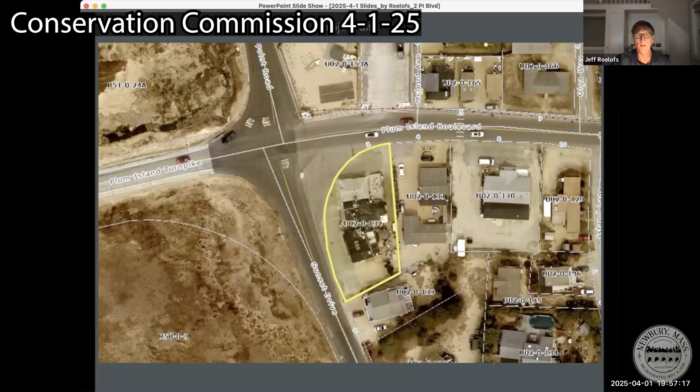I'm going to start by getting you oriented to the site. This is the former Plum Island Grill site, I'm sure you're all familiar with it, right at the intersection of Plum Island Boulevard and Sunset Drive. This is a Google Maps street view of the property, and another view from the other angle, looking back towards the property and the intersection. You can see this stop sign here, and this is the former restaurant sign, but the stop sign is a good landmark to keep in mind as we get into the plans.

This is an overhead view of the property. I'm partly just running through these so you know these images are here if you have questions and want to drill down to any details.

You can basically see most of this site is either paved or under structures, with pretty intense disturbances on the small area here and behind that's not paved. Dumpsters, recycling bins and the like, deliveries. Just another view of the same building from a different angle.

Existing conditions, again, the stop sign up here in the corner. You'll see when we get to the existing condition survey that the property itself is much tighter than the paved area that extends all the way out to the stop sign. So that area is a town-owned area over which Mark has had the right to park for many years, associated with the restaurant use here.

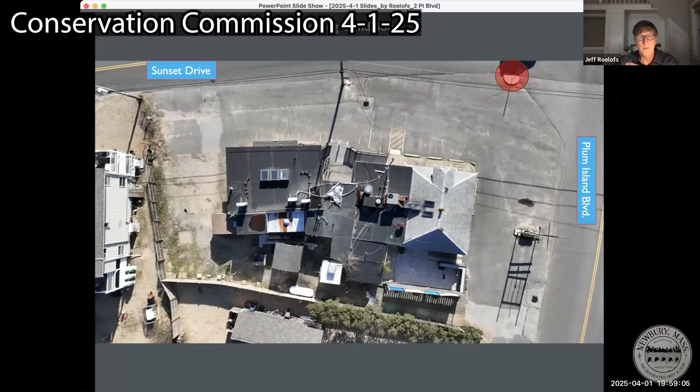Again, just looking at it, you're familiar with this, but it's completely paved in front of the building, including within the arc of the property, as well as the town-owned area here. And the parking has extended historically around the entire perimeter of the building, with active deliveries and the like extending around the back of the property.

So existing condition survey, these are in your files. We can go back to it if you want. And this is the proposed conditions site plan. I think with that, I'm going to turn it over to Steve. Steve, I'll control the slides if that works for you, but take it away.

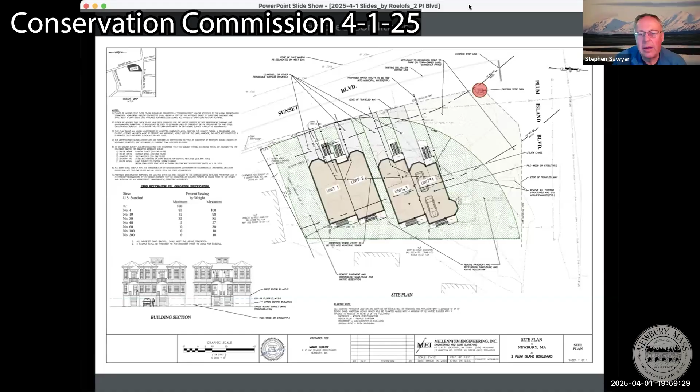Good evening, Steve Sawyer with Millennium Engineering. So this should be pretty quick. It's pretty obvious that this is a tremendous benefit environmentally.

You can kind of see in the background on this plan, all the demolished structures in a faint red color around the perimeter of the building extending. You can see that the existing restaurant is probably about 3 feet off the property line at the intersection, and it extends this hodgepodge of extensions and alterations that expand across the entire property all the way over to Unit 1, where you see there's a walk-in fridge on a deck foundation there in the rear. So the proposal is to basically remove all structures and pavements on this property, 100% removed.

The proposal is to construct 2 duplex units, 2-story units with parking under, with driveway access from Sunset Boulevard. You can see that there's 2 duplexes with about 7 feet between the units. And then the remainder, other than the driveway, stairs, landings, and such, the entire property that we have control of will be restored.

We'll be removing all of the pavements, gravels, and such, and restoring with beach sand, then planting with dune grass. We have a miscellaneous planting note, so there'll be dune grass along with some shrubs and such throughout the property. We will be meeting a specification I've been made aware of for Plum Island, the sand sieve analysis, so we'll ensure that all of the sand imported to restore the property will meet that gradation requirement.

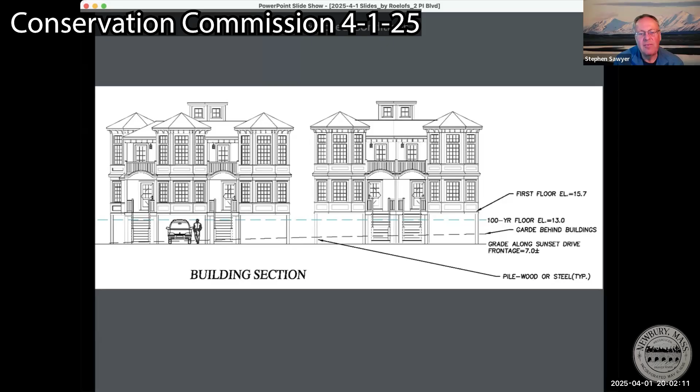Pretty straightforward, with no fencing or such to inhibit movement of flood water or sands throughout underneath the building. So the buildings will be fully compliant with Mass Building Code and with the FEMA flood hazard construction standards. So environmentally, it's a pretty straightforward project, a tremendous improvement to what's there today, restoring. I think about 60% of the site's going to be restored with sand and vegetation.

And then a huge benefit for the town - I believe years ago there was discussions about improving that intersection. So you can see that our driveway is still quite a ways from the stop sign. The Unit 4 driveway is still a tremendous distance away from that stop sign and the stop line there at the intersection of Plum Island Boulevard.

The area hatched in orange is the area that is currently under Mark's control, or for the restaurant use, control for parking that will be no longer needed, and allowed for the town to take over and do what they, I guess, implement their plans for that intersection. It was a few years back where they had plans to make some improvements there.

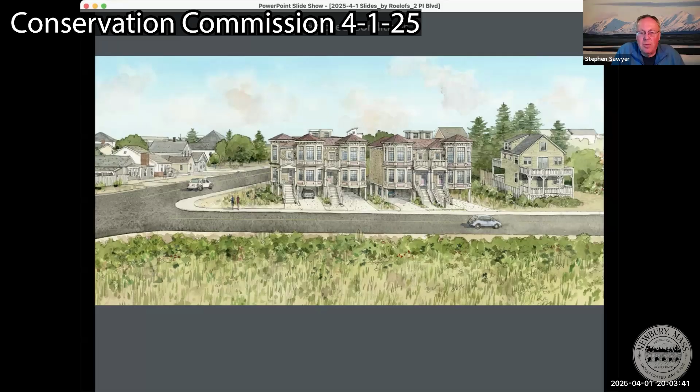So I think it's a tremendous benefit environmentally, safety-wise, with the removal of the high intensity use - a restaurant is a high intensity use - for a much lower intensity use environmentally and on the zoning end, which I guess is not the purview of this board, but on both aspects here.

That's it for our presentation, Mr. Chairman. We'll turn it back to the commission.

Okay, Mason, what do we have? Again, the commission usually reserves our comments until we have the file number and any technical comments, but where we've opened the public hearing, thank you for that. Mason, any raised hands from the public that want to add comments at this point? Not seeing any.

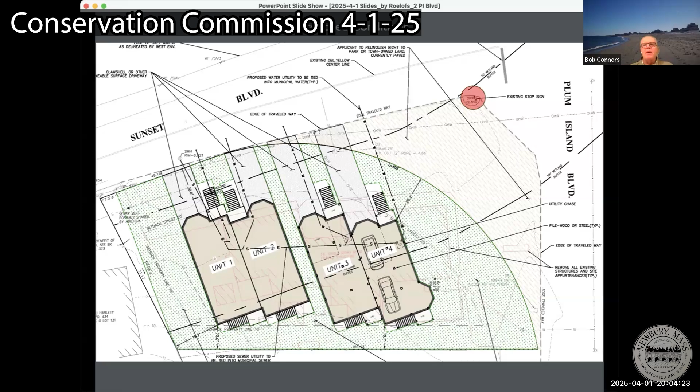Okay, well we had a ton of people on earlier. I guess that was the 80 Northern Boulevard crowd then. Actually, one item with this project is that it's exempt where we're under 5 units. This project is exempt from stormwater, Mass DEP stormwater.

Okay, what about our local stormwater, Steve? So Steve, let me go into what I see. There's a couple of things. Interesting project, complex because the overlay, the Plum Island Overlay District has a guideline. It's kind of tied into our wetland bylaw, it's intertwined. But that's going to be a matter determined by zoning. But we are going to, pursuant to our bylaw 9513A, consultant services, require peer review on this project.

There's a couple of open items. There's an existing order of conditions dating back to June of 2000 that hasn't been closed out. And there was a ZBA decision in May of 2017 making a determination that work could be done in the tent area. The work has been done, but we have no record of any application for an RDA or a notice of intent. So there's a document review being done by ISD and by Mason to see what outstanding issues or lack of permits there are, and we're gonna have to address all this at some point.

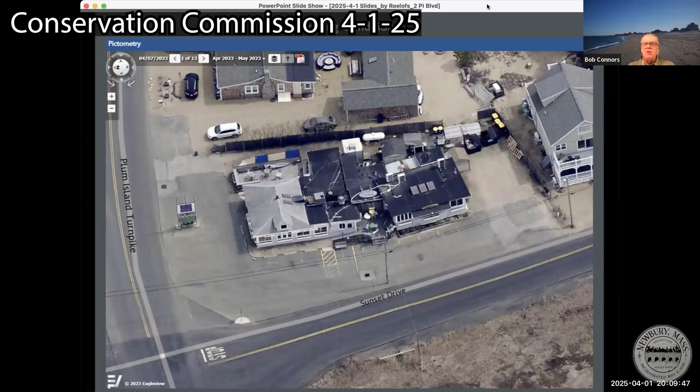Right, that's fine. So guys, why don't you do this? I'm assuming you're requesting a continuance to our April 15th meeting? Yes. Okay, I will entertain a motion. Mason, you have your hand raised?

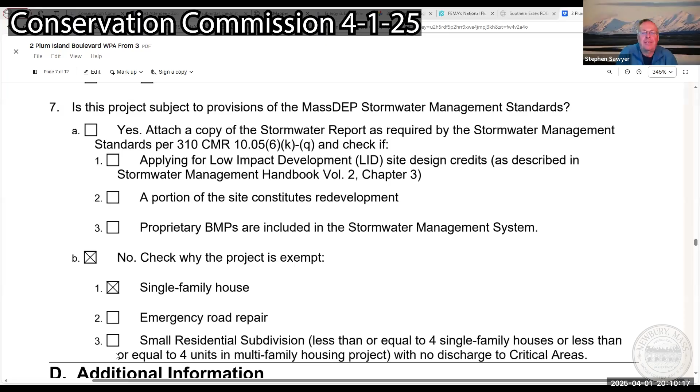If I could just clarify real quick, I know you said stormwater wouldn't be applicable. I just want to confirm that on the WPA form, you click no because it's a single family house, but as a multi-family proposal, are we looking to check off those boxes? Yeah, check there. Just wanted to double check item 3. Yep, no worries.

Okay, I will entertain a motion to continue this public hearing at the applicant's request to our April 15th meeting. So moved. Second. Okay, roll call, all in favor? TJ? Aye. Woody? Yes. Nick? Aye. Diane? Yes. Thank you, guys, we'll see you on the 15th.

Okay, so under general project discussion, there is going to be a site walk for wetland delineation this Friday at 2pm for 34 Central Street. You're all welcome to go. This is the MBTA zone, correct? Could you repeat the time and date? Yeah, it's this coming Friday at 34 Central Street at 2pm. All right, thank you, I appreciate it.

Mason, why don't you just send out a communication notifying everybody that it's available? This is a prelim, obviously. Yeah, that would be great, Mason could send an invite. Those are always helpful, I can dump those right into my calendar.

They're really helpful. Okay, team, any last comments? TJ, any words of wisdom you want to add before we call it a night? Stay warm. I got something quick to add, Bob, if you don't mind.